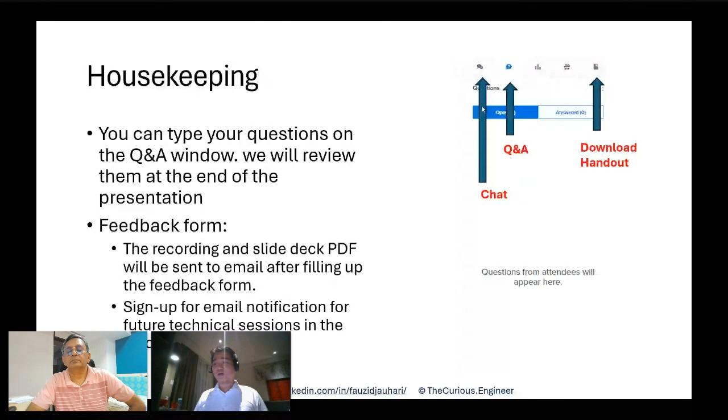Okay, I don't want to take too long, I'll go fast. Basically, the session will be two parts. I will cover the first part, giving a bit of overview of blowdown, especially the technicality and the availability of tools in HYSYS, the different steps you need to do. And the important part is part two, which Viresh will deliver, on the case studies using depressuring utility as well as the blowdown utility. I'll turn off my video now to save bandwidth and to allow you to focus on the content.

All right, let's get started. So the blowdown, right? Depressurization, right?

So what is actually blowdown analysis? Basically we want to rapidly reduce the pressure or depressurize the vessels or equipment. When we actually do this, typically, maybe first, why do we do it?

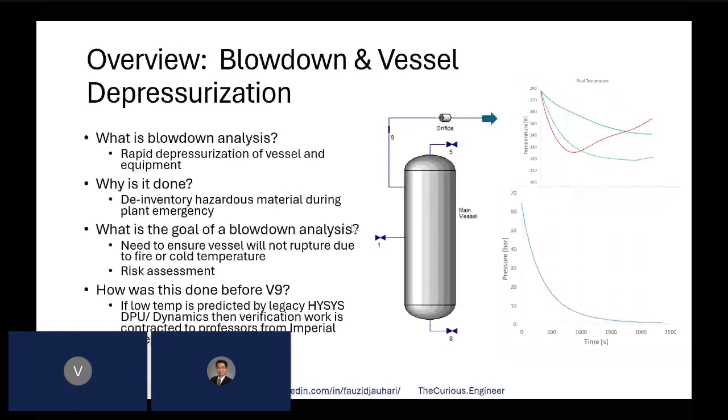So typically, what are the questions we want to answer? So depending on where, let's say we are designing a system, definitely we want to size the system, and one of it is to determine the size of the orifice.

To allow that we will achieve or reduce the pressure, let's say based on the criteria—it could be half of the design pressure within 15 minutes. So what flow rate do we need to pass through that orifice? What is the peak mass flow rate that needs to pass through that orifice?

So this will also determine the size of the pipe in that system. It could also influence the flare system, the main header, and the downstream system on the flare. Okay, and also typically we also will look into the temperatures.

This will impact what materials should be selected. Of course, if we encounter low temperature, then probably we need to switch to a more appropriate material, like stainless steel.

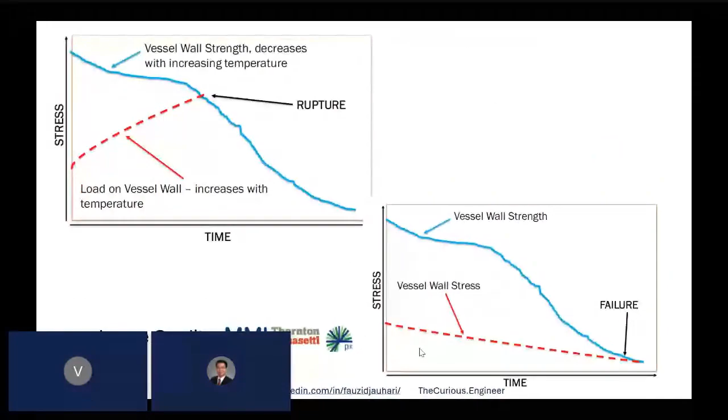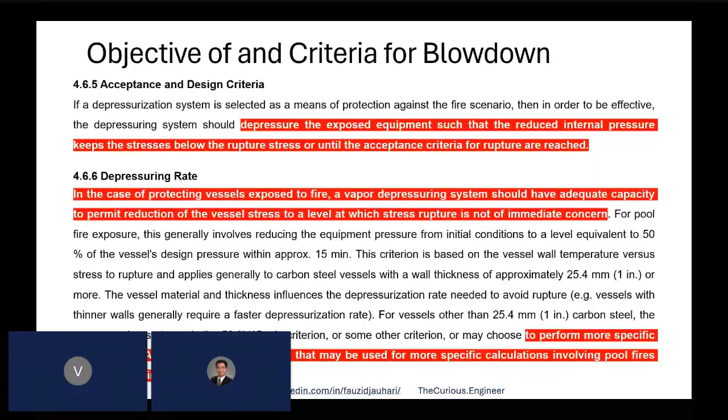Excuse me, yep, go ahead Fauzi. Sorry Viresh. Yep, looks like the audience are unable to see the slides properly, there's an obstruction from our profiles over the slide. Can we hide our profiles? Let me stop sharing, in case that helps. Just in case, right, and people have also requested about the recording.

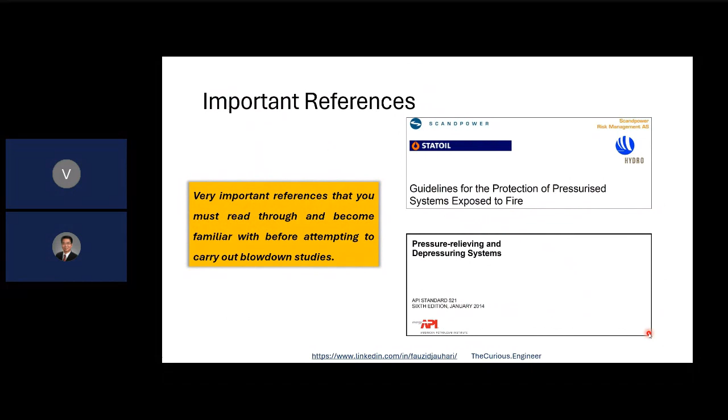All right, let me go through this. I want to share a little bit before we have the blowdown utility, we actually have the depressuring utility. In that depressuring utility, if you have used it before, we calculate the total volume of the system, including the piping as well as the vessels. Typically we do these calculations in Excel, and we come up with a new equivalent vessel dimension, so in essence we combine all that volume from pipings as well as the main vessels into one single vessel with a new dimension which reflects the system volume.

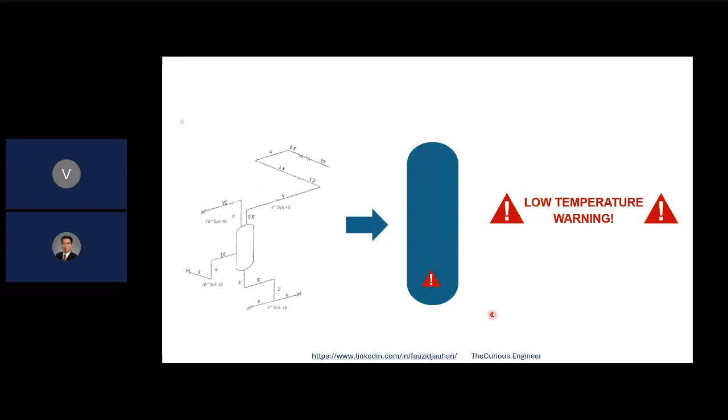So by doing that, when we run the depressurization calculations and encounter low temperature, it is hard for us to determine, or it's almost impossible to determine, whether it's really the vessel or only certain piping. We can't know, because everything is combined into one single volume or system. So if we make a decision based on that, we have to change the whole system, let's say to stainless steel, then it will be a major cost impact to the project.

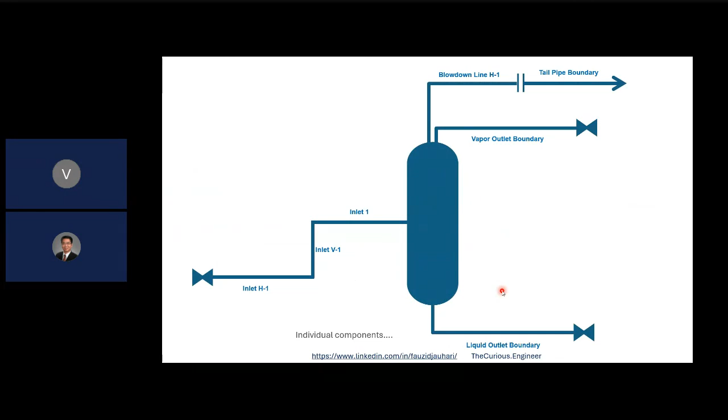Okay, so in the blowdown utility, now basically we model all the systems individually. So when you go through the blowdown utility, you will specify how long is the inlet piping - the horizontal part, the vertical part - all the other lines, also the vapor outlet, the blowdown inlet line, the tailpipe. So all this is actually defined as individual system components, the pipes and the vessels separately.

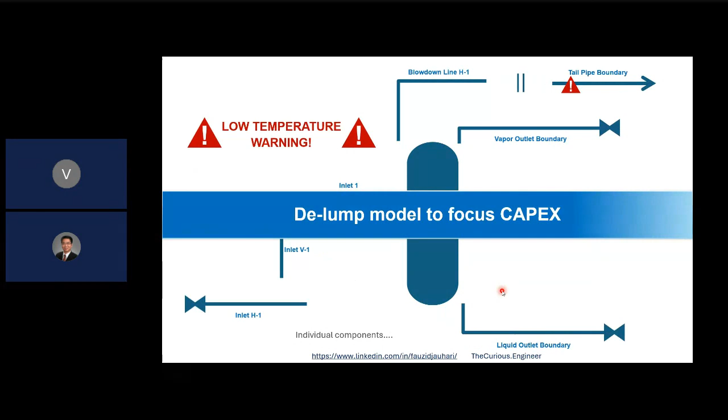So we are inputting the individual components. So when we have an issue, or the calculation detects low temperatures, we can actually know exactly which part of the system is exposed to the low temperature.

Okay, so just to give some background, the blowdown technology which is incorporated in HYSYS is acquired from Imperial College, and has been validated with over 400 projects. So it does help to minimize capex, validate the wall temperature predictions to within 3 Kelvin, and eliminate uncertainty in analysis by using a fully predictive, rigorous thermal package.

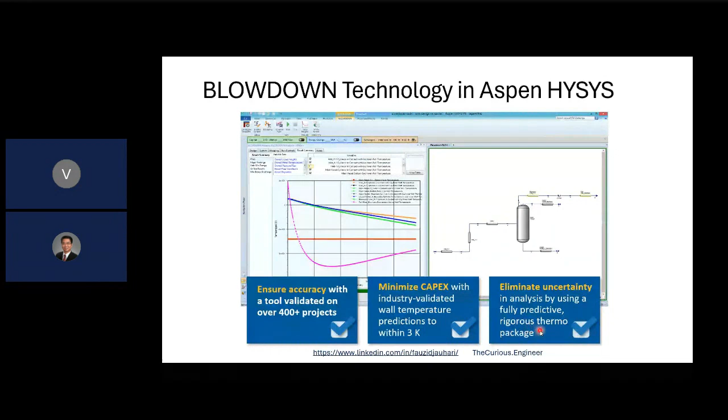Okay, this is the background. It's developed by Dr. Graham Saville and Professor Stephen Richardson from Imperial College. Initially, blowdown was offered as a consulting service by Imperial College, before it was acquired and incorporated into HYSYS. So it was trusted, and the gold standard of the technology for depressurization, and it has been validated against actual plant data for nearly 30 years.

We have, so you can predict the accurate temperature within plus minus 3 degrees Celsius. It dynamically simulates the hydrocarbon flow from multiple depressuring vessels and other equipment, and is also a fully predictive model.

So maybe many will ask, what's the difference between the legacy depressuring utility and the HYSYS blowdown? Just to make it clear, blowdown is the recommended tool or technology for depressurization. It has been trusted by the industry as proven technology. It considers the nucleate boiling, as I described just now, it considers the rigorous vessel, piping, orifice model. It's also thermodynamically able to handle dense phase fluid. And the other thing is, when you use the depressurization utility, you need to input constants, like for example the PV work term, the recycle efficiency.

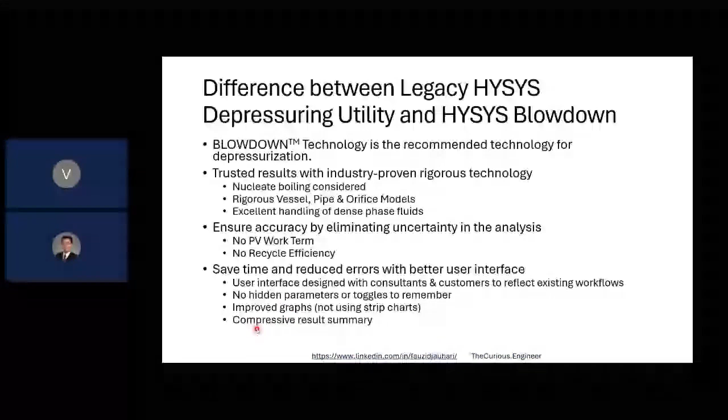In terms of the calculations involved in blowdown - what actually is involved? First, of course, the fluid mechanics - it could be one dimensional, one phase, or multi-phase. Three-phase is also possible with high water content. Also, of course, the thermodynamics.

For multi-phase, multi-component, near critical conditions, we actually have to predict the phase envelope correctly and accurately - the liquid density, the latent heat. And also the heat and mass transfer - heat transfer from the environment, the fire case, conduction, convection, boiling, and also radiation if there is a fire.

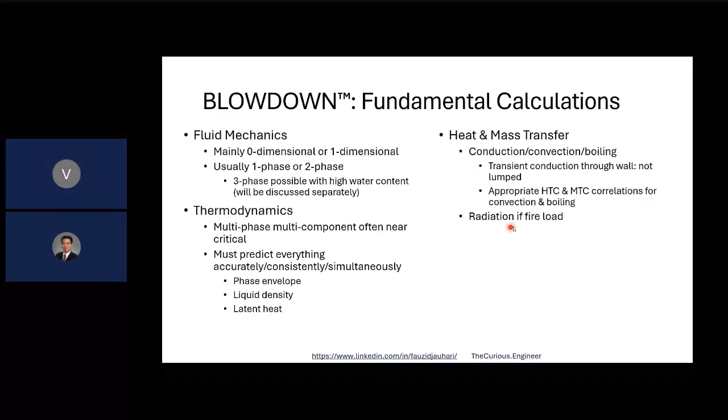So, in terms of the thermodynamic model, it uses a proprietary equation of state model. It's only available in blowdown, it cannot be selected in the property environment.

It has a standard set of component lists. This equation of state is superior to the property environment in predicting supercritical fluid properties, and it's fully rigorous and predictive - no need to specify again the PV work or the recycle efficiency.

This is just to give illustration that in upstream applications, the conditions of the vessel actually start at the supercritical region, then move across to the vapor liquid envelope. Blowdown can predict this kind of change of trajectory, including the change of properties accurately. If we're not able to predict this thermodynamic behavior, we could end up oversized or undersized, depending on the case - a poor result.

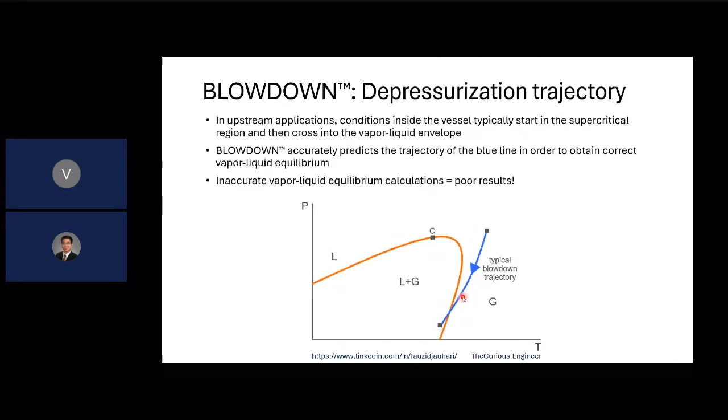In terms of the orifice calculations, these are the background details. The expansion is assumed to be reversible from upstream to the orifice, then assumed irreversible from the orifice to the downstream. The pressure drop in the upstream piping is neglected. The shape of the orifice itself is typically reflected in the discharge coefficient you're using.

The discharge coefficient is a ratio between the actual flow that can pass through that orifice or opening, versus theoretically the maximum that can pass through that opening - like an efficiency of the opening. Typically it's about 0.9 for gas or a mix of gas and liquid, assuming the homogeneous equilibrium model, and about 0.6 for liquid or flashing liquid.

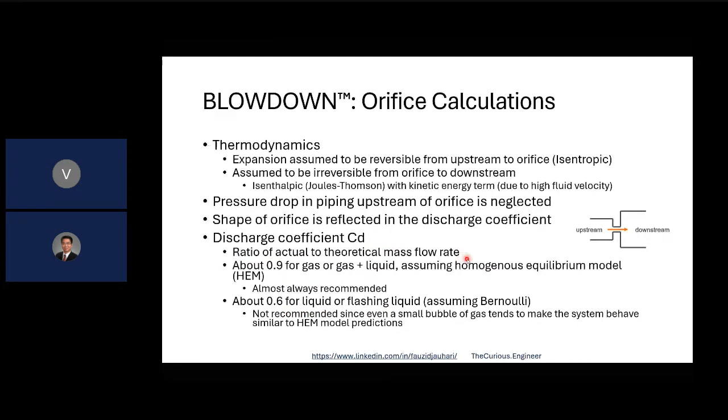All right, so this is a snapshot on how you use the blowdown system.

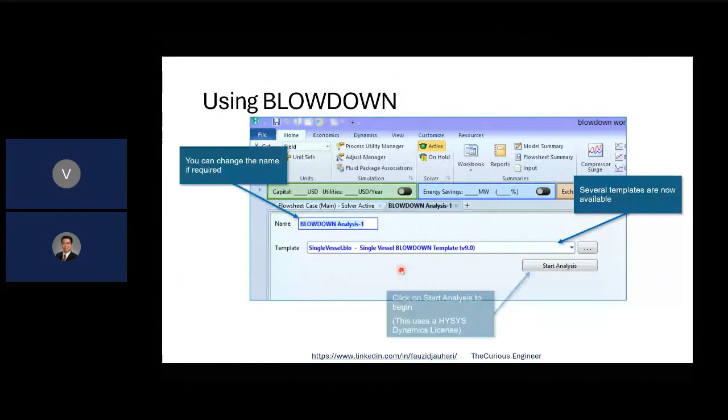Let me show this in the home screen. You have this safety study - when you click this, you can see there's blowdown depressuring. You just click blowdown and it will open a form like this. You can name the form, and choose the template - for example, a single vessel template. There are several templates available. Then you can click start analysis.

The liquid drainage is important also to accurately predict the wall temperature, because the liquid will actually act as a moderator and will result in milder temperature predictions.

Typically blowdown is performed in two types. The cold case, assuming there's no heat input from the surrounding - fully adiabatic. This is basically done to check any issues with low temperatures, if there are any potential issues with low temperatures.

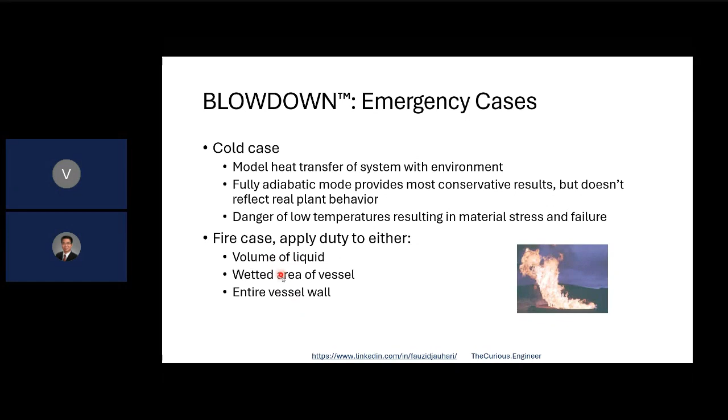But we also do the blowdown calculation for what is required for fire case - whether we can actually evacuate the inventory, size the orifice properly, and confirm that we can reach half of the design pressure within 15 minutes. For fire case, you apply the duty, the heat input to the volume of liquid, the wetted area, or the entire vessel.

I just want to give also - when we are doing blowdown calculations, when we're doing equipment sizing or any sizing, typically we deal with two types of calculation mode. First is design mode, and second is rating.

By default, the calculations in blowdown is a rating mode where you actually specify the opening. You specify the opening and you check the performance - whether the targeted pressure can be reached or not. By default, that is the calculation mode of blowdown.

This is maybe applicable for existing facility - you might want to validate existing facility performance, yes. But for greenfield or designing a new facility, you'll need to calculate the orifice.

So typically, what we do is we put an adjust - we adjust the orifice opening to target the final pressure. You have to activate this tick to automatically run blowdown on input. So what this adjust will do, it will actually vary the opening until it gets the final pressure within the time targeted.

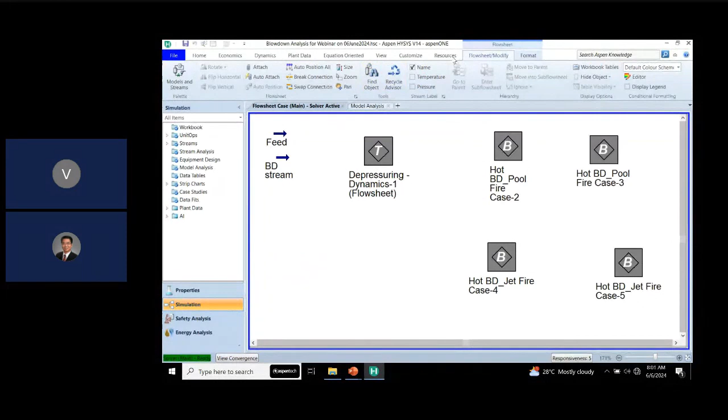Okay, let me see. Let me open up one example here also, just to show you what.

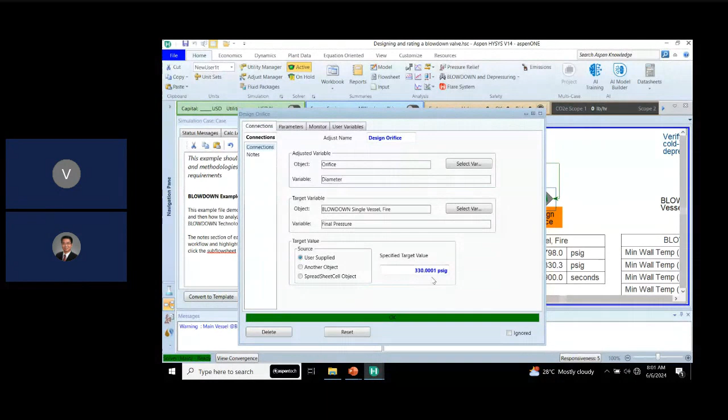Okay, so here you can see this is the design - you put design adjust operations, and basically we target the orifice of the blowdown utility, and the target variable is the final pressure. We can input the final pressure here. Just make sure also the blowdown utility to tick this Run BLOWDOWN on input.

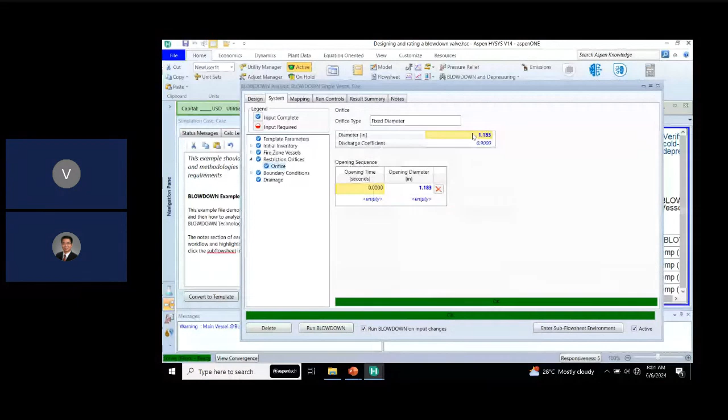So then it will iterate to find the opening of the restriction orifice. So it will adjust this opening.

Just to also - when we're talking of this blowdown, individual system blowdown, especially maybe for existing facility, additional system - when you calculate the additional blowdown peak flow rate and add it to your current total blowdown peak flow rate, it might actually exceed your flare capacity.

So in that case, your flare capacity header or tip might be designed for a certain flow rate. So in that case, many companies have considered to actually stagger the blowdown - meaning they will prioritize opening the critical system, but some systems they will not open all at time zero, they will open it at different times, just to avoid the peak, especially at time zero, exceeding the flare design capacity.

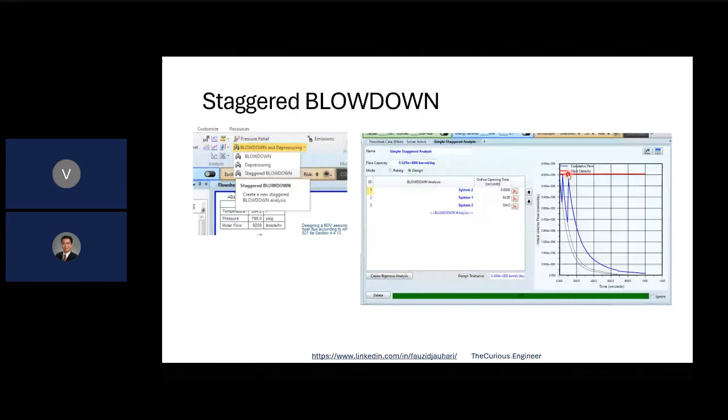So this analysis can actually be done easily in the staggered blowdown. You can see here we have the staggered blowdown utility. Let me open also just quickly.

So by doing the staggered blowdown, you have to do individual blowdown first. So basically it will actually superimpose the calculation from each of the systems. Here, you only need to put the flare capacity.

If you put design, then it will calculate when the system needs to be open - is it zero or some other time? If your rating, basically you put the time yourself. So that's just a quick introduction on the staggered blowdown, just in case.

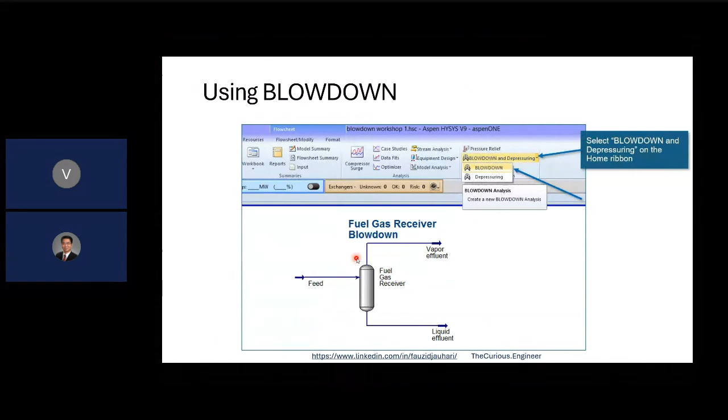So this is, I think I've gone through this already. Then defining the blowdown - okay, let me open this.

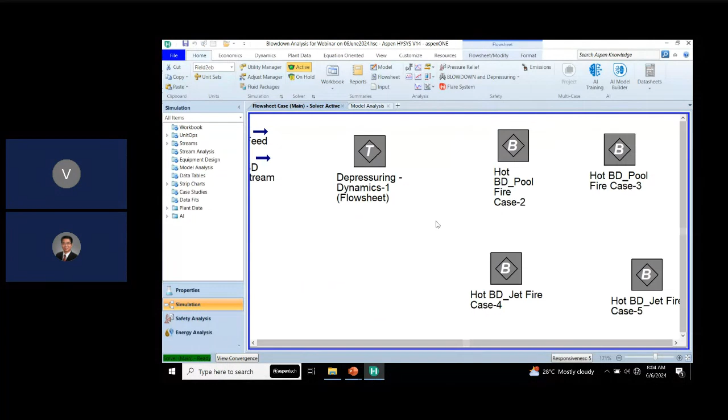All right, so let's say I'm just opening. Right, so actually here you can see - I'll go through this quite quickly. The slide that actually explains this - give me 1 second. Right, so let me open this.

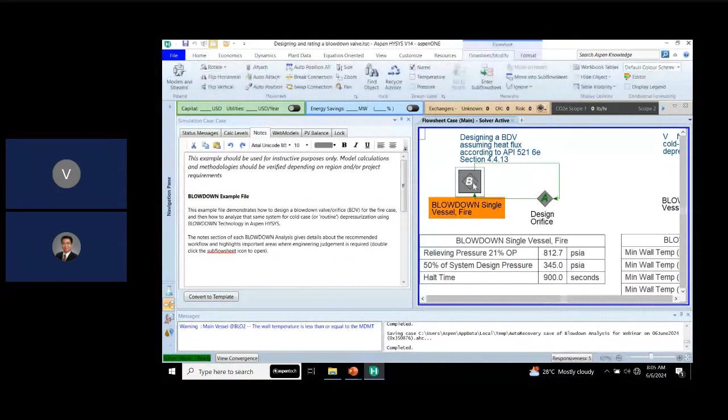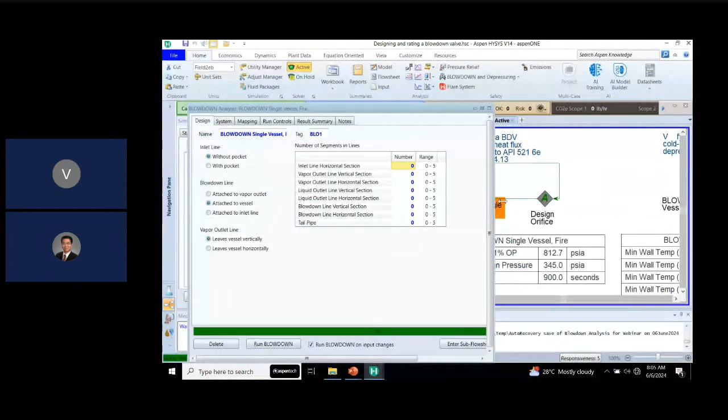So basically here, you can see, this is when we define the blowdown - we define how the inlet lines, etc. are set up. You can see here, alright, yep, like that, okay you can see here.

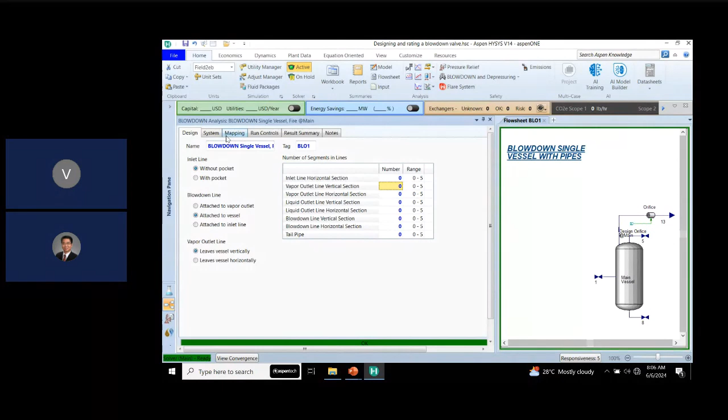Actually we can vary this - typically, for example, you can see we're removing all the pipe, but you can include, for example, the pipe like that. So typically the number of pipes there depends - for example if your inlet line has vertical, horizontal sections, or your line has multiple sizes, then you can put different segments. We can accommodate up to 5. So this is defining the system.

And again, this is where we will define the compositions. We can copy the compositions from the inlet stream.

Then also for the vessels, we define the dimensions, the thickness, the design temperatures, and also the orifice. Once we define the systems, basically we'll go to the mapping.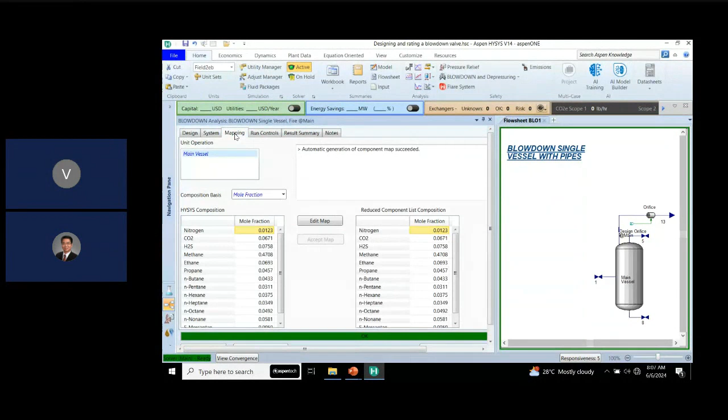Blowdown will look at your component and map it. One thing is it will not map the hypothetical component, so we will need to make decisions on how we're going to map if your fluid involves hypotheticals. I've gone through this one already - I think this is the template.

If you have vessels in the system, you can define using this tick box which part is actually exposed to fire.

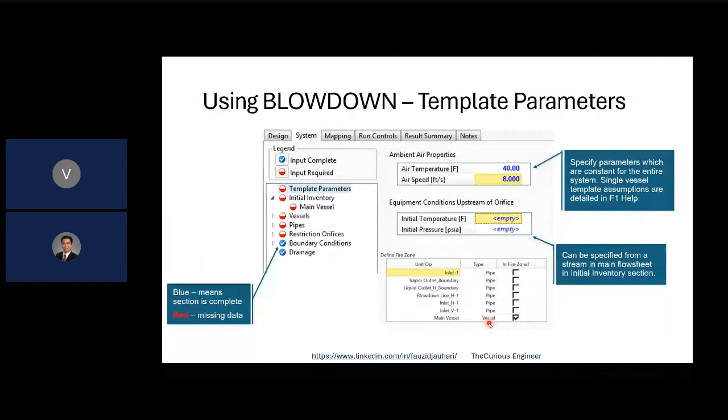So this is the few steps you can go through, like copying the initial conditions, the vessel definitions, and the fire case. Typically we also define what is the initial liquid level.

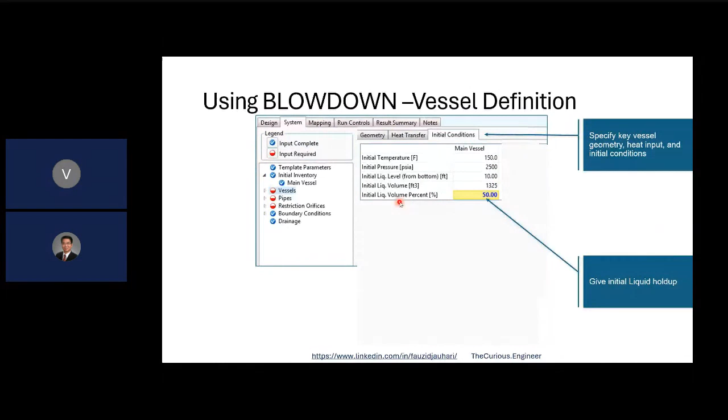Liquid inventory in the vessels. So here is where we define the individual pipes. Remember, in blowdown we define all the details of the individual pipes - we don't lump it together with the vessels.

So you can see we can put the material, the pipe schedule, the size, the length, if there's any change in elevations, as well as the design temperature. When you put the design temperature, it will then highlight if this design temperature is exceeded or violated.

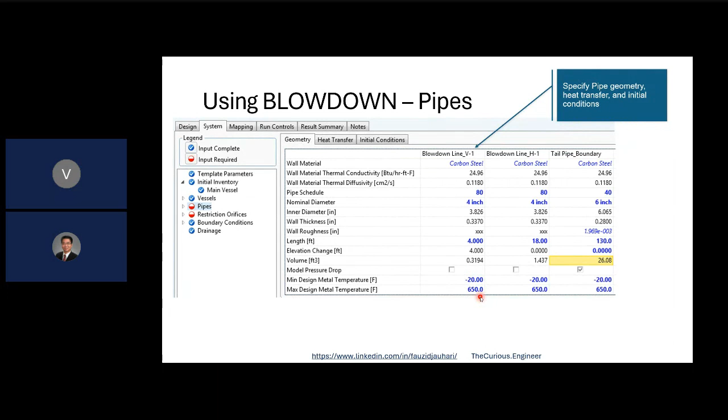Here is where you put the orifice. Remember, by default it's a rating calculation, so you define the diameters and you check the performance.

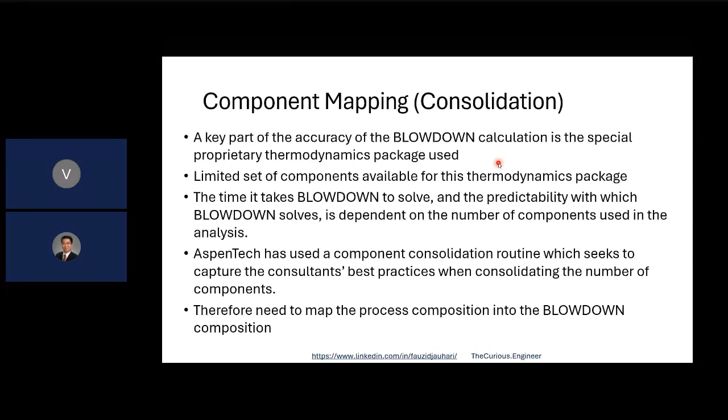Touching on the component mapping - I guess the time is quite limited, and in essence, blowdown will do the auto mapping. But it will not map the hypothetical, so we will have to make the decisions. For example, the simple, straightforward pure components will be mapped automatically.

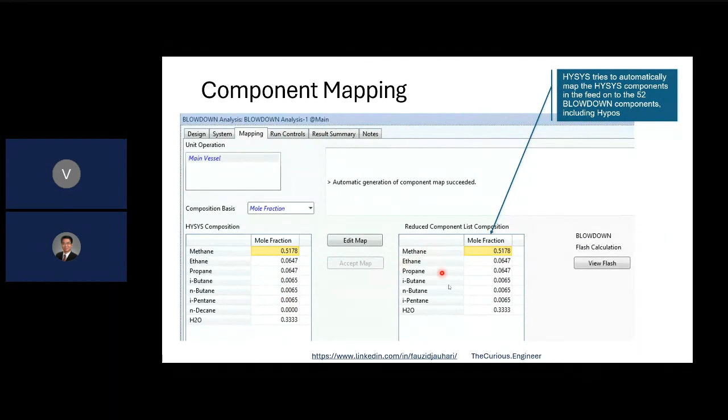You can click this edit map to view. So you can see here, certain components like the hypo component - there's a method on how we actually can map to which component, based on molecular weights, etc.

The details of the approach are put in the appendix of this presentation. So this is an example - for example, we have to find the component with the closest normal boiling point. For example, N-pentane is the lower molecular in the list, N-heptane is the higher molecular in the list.

Basically, we distribute the components for that hypo into these two blowdown components. So this is the kind of prorating of the two components. We can see from one hypo component, we split it into this pentane and heptane.

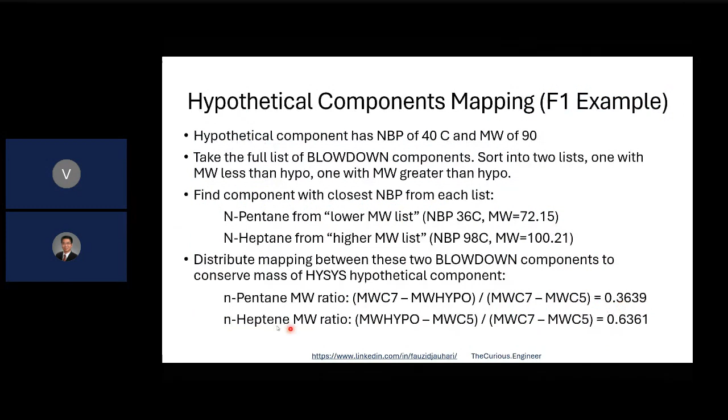Okay, then finally the run control - this determines when we're going to stop. So either by time, say 15 minutes, or when the final pressure, the targeted pressure, is achieved.

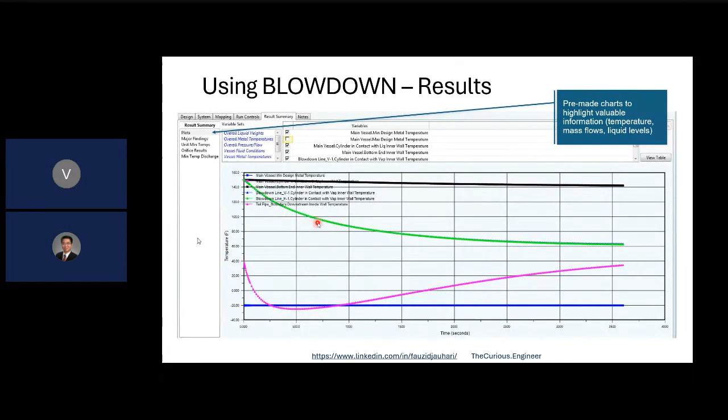So once we run, we can get the plot, the summary of findings - for example, how much flow is actually passing through the orifice, what about the temperature on different sections on the vessels, on the different lines. All right, so I think that's a lot.

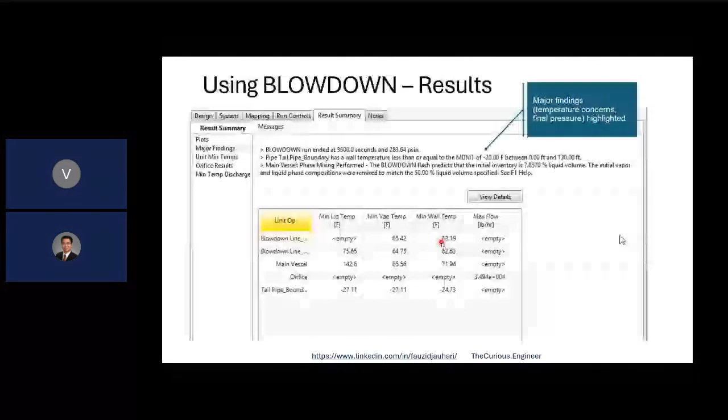But I hope that gives a good overview of the functionality of the blowdown. I think next I will hand it over to Viresh. I'm sorry, I think I've overrun, but let's get to the exciting part, the case study.

Viresh, maybe you can share your screen - you want me to flip the slide, or let me flip the slide? Can you see my screen, Viresh? Yes, I can see it, and please do me the favor of flipping it. All right, thank you Fauzi. Especially, I want to thank you for inviting me to host with you. I get this opportunity to share some of this stuff to the people.

Okay, I have seen some questions - I'll try to capture some of the answers here. Fauzi has already given some descriptions about some basic fundamentals and some basic procedures.

Which I will pass through in a fast mode. But remember, since today we are focusing only on how to utilize the utility from HYSYS, we are not talking about technical details. There's a lot of other issues related with technical, which is not possible to capture now. Probably we'll have to plan that webinar separately. But some relevant aspects I will still

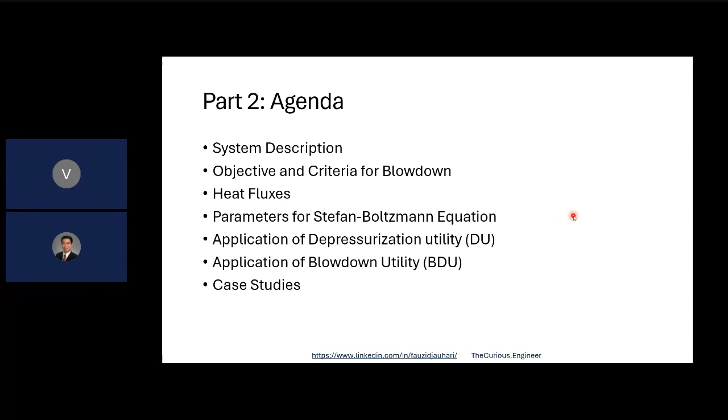So the cases which we will go through: first we will size the orifice for a system, which I'll describe later, using the same old concept of 7 bar G in 15 minutes depressurizing. Then whatever orifice size we get from this depressurizing utility, we now use blowdown utility with the same conditions, but using the fundamentals of BDU, blowdown utility, and see what is the difference between when we use DU and when we use BDU.

So once this is done, we will incorporate the concept of heat fluxes, and then see what it means when we use heat fluxes, how it affects the results. So all these three cases will be based on the pool fire.

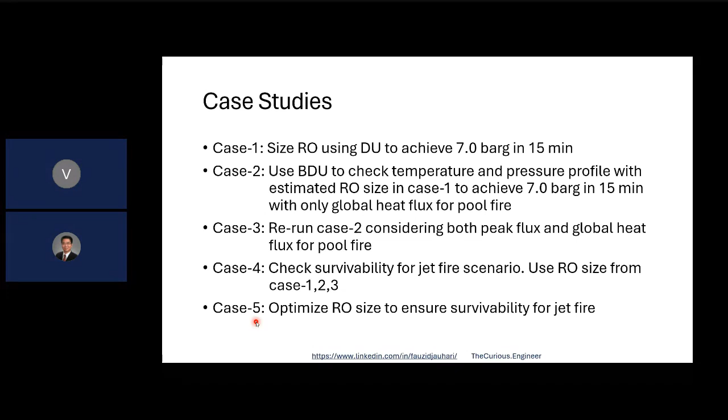The next two cases, case 4 and case 5, we will talk about jet fire, and how the same orifice size behaves when it is jet fire. Then we'll try to figure out whether it was good enough or our equipment is rupturing. If it ruptures, then what should have been the orifice size. So that is how we'll cover one single case, one single system, in different scenarios.

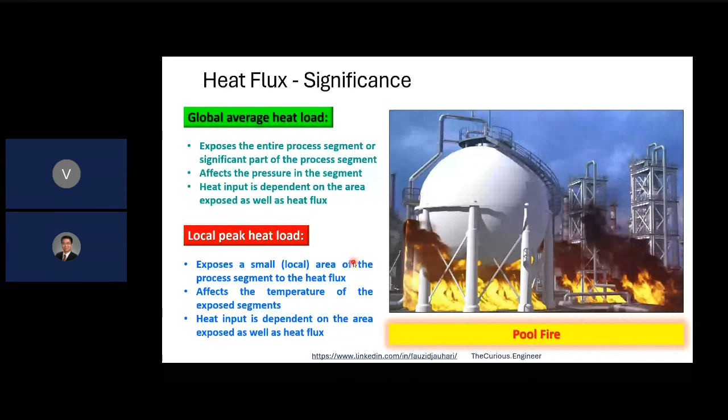In the next slide is jet fire. Jet fire is something which is coming from the source, the leak. So the local peak heat load, heating the vessel, the surface area is quite less compared to pool fire, but the intensity may be more. But fundamentally the same thing: the rest of the area which is not experiencing the heat directly, the heat absorbed is called global average heat load, and that is the one responsible for increasing the pressure inside. Next please.

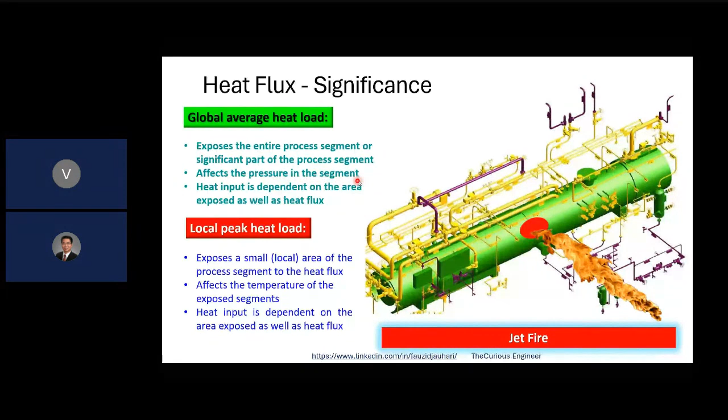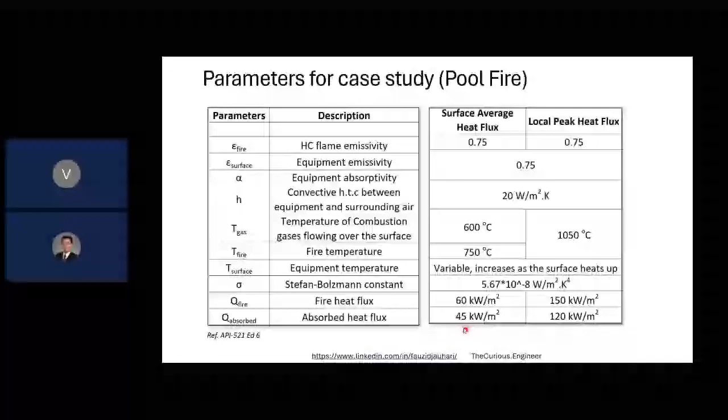See what happens in the jet fire. When the jet fire starts, the power is enough because pressure is still there. As draining takes place, the pressure inside the source will keep on decreasing. So the length of the jet fire and the location where it is hitting will keep on changing. Slowly the fluid coming out of the hole causing the jet fire will keep on reducing. So that is our two flow rates, and we are supposed to handle both. How we will handle and how we do it, we will not be able to capture now.

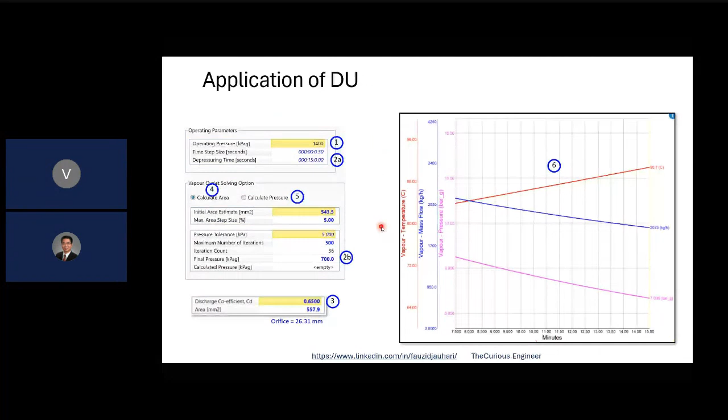Now here, the same system, now we want to talk in terms of blowdown utility. You see, you have got a vessel here, and you can represent all these pipings into different configurations, like whether your blowdown is at the inlet or at the vapor outlet, whatever. But the important thing is here.

I have given you a very simplified version of the system, but whatever system you will be dealing with, you have to figure out which part of the whole system is going to be exposed to global heat flux, which part will be exposed to local heat flux, how much, and which piping will be exposed to what type of heat flux and what type of heat. To get all these answers, I'm afraid this is not the right place because it is a whole lot of other detailed part of it, so I will not be able to do that. But the important thing is that here you have the opportunity to decide which section of your system is going to be exposed to what.

Like there are some systems which may extend from a source to some other location, and in between there is a bridge, or a firewall, or some structure. That means the heat may not be able to go that far. So to be able to do justice properly with the component and give them proper heat absorption, it is a very good idea to have a very good knowledge about the 3D model.

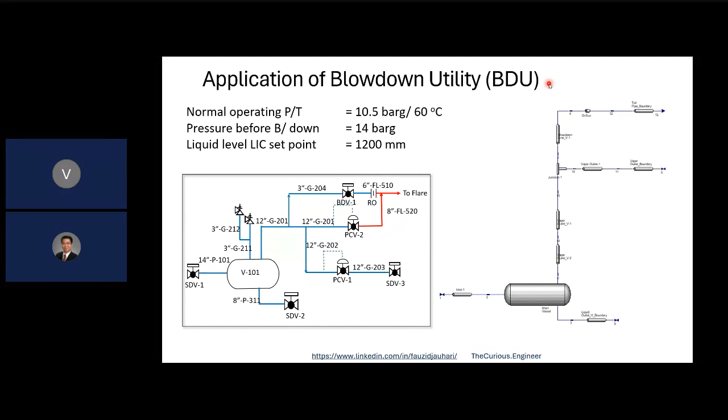When you will be entering that information, this is the sequence of information you will be entering: one, two, three, four, five. First you enter the design data, then system mapping and all those things, like that. Let us see if we can give you some indication about the example we have taken and how we have entered the data.

Now see here, this vessel has got inlet, vapor, liquid, blowdown, tailpipe. So what I have done is to represent my system, which is on the right hand bottom line. I thought that this type of configuration which you see here - inlet line, how many vapor lines around - so I tried to find out how many numbers of which type of lines can be representative here.

Each of the type can be 0 to 5, so almost 35, 40 pipings can be accommodated. But suppose your system is too big and you want to lump. So when you want to lump, like for example...

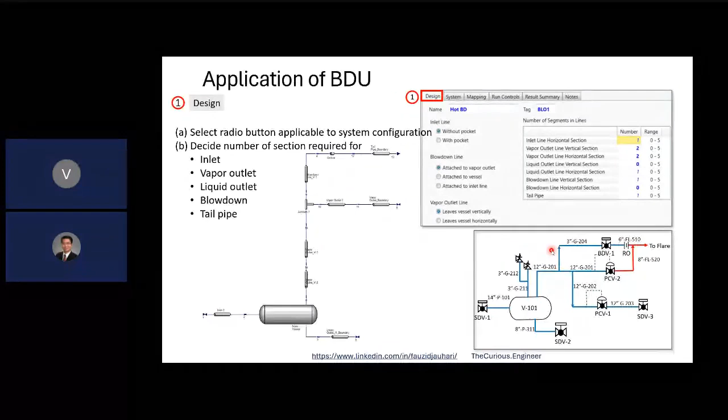The piping just above the vessel vapor outlet, the first and second - suppose there is something which you have to lump, and suppose it's not possible to accommodate into the whole system. So whenever you want to lump, make sure the lumped pipes have the same thickness. It should not so happen that you have lumped the piping to make the common volume but with different thicknesses, because different thicknesses will absorb heat in different ways. So make sure that when you lump it, the thicknesses should be the same. Okay, next please.

Now this is about when you start entering the data in the system template parameters. In the template parameters, what you are doing is defining your air temperatures, because your air speed and air temperature are going to affect the heat carried away by the air, and ambient temperature will affect the heat absorbed by the vessel. So you enter that data.

Then initial conditions - like I said, some companies want to start their blowdown based on your pressure alarm high, or 90% or 85% of the safety valve setting, or whatever your company decides. Or if you are from a consultancy background, whatever you have been advised to do. If there are no instructions and you have the liberty to take a decision, probably you want to be conservative.

Now at the bottom right hand, where you see fire zones - there is different piping on the left hand side, unit operations, then type. So you have got a vessel and so many pipings. This is where you decide whether it is a pool fire or a jet fire, or a heat flux - global heat flux, or peak heat flux, local peak heat flux, whatever it is. You select here which one you want to be exposed and which one will not be exposed.

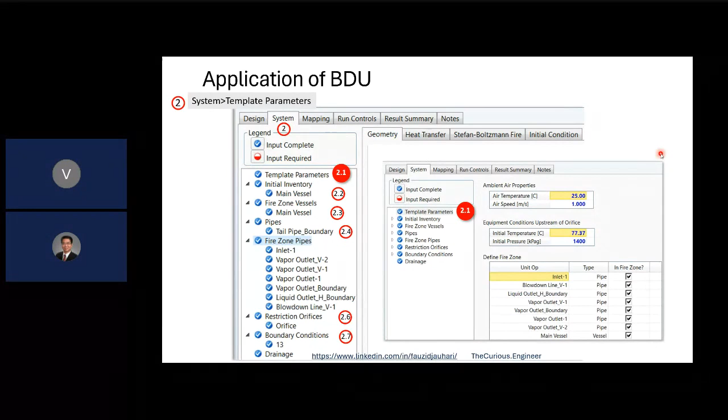So this one, we are talking about the stream. Because if it is a simulation, you need to have a stream defined, so that you can link it - because the blowdown utility is going to be a standalone separate simulation model. So what you can do, you will have some main model for the whole facility. From that model, for every system which you want to deal with, there will be some inlet stream. So in that inlet stream you can export and then import back to the new slide, and then you can link it - but make sure that stream is well defined, meaning it is already solved and not unsolved.

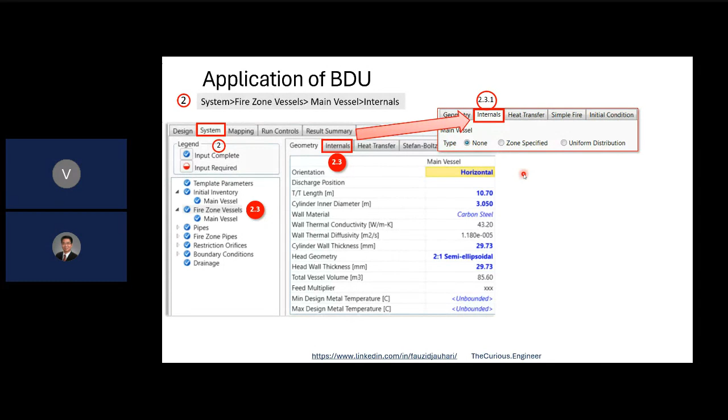Now I have been talking about heat transfer. We already have entered the mechanical data. Now we want to take a decision on which type of heat we want that component to absorb. You have the option to select whether it is simple or Stefan-Boltzmann type. Simple means the type you normally do through DU. Stefan-Boltzmann means the type you do through BDU, blowdown utility.

If you see here, the information for simple fire is mostly automatically updated, automatically populated. You don't have to do much. But for Stefan-Boltzmann fire, you have to manually enter the data.

For this example, I have taken jet fire. So this information has come from where? Let us see. Can you click that back arrow at the top? Yeah, this one. So you see a jet fire.

Local peak heat flux and then surface average heat flux. If you see here the temperature is 900, your heat absorbed is 85, and your heat transfer coefficient is 40. So that information has gone there. But I have taken this for only more than 2 kg.

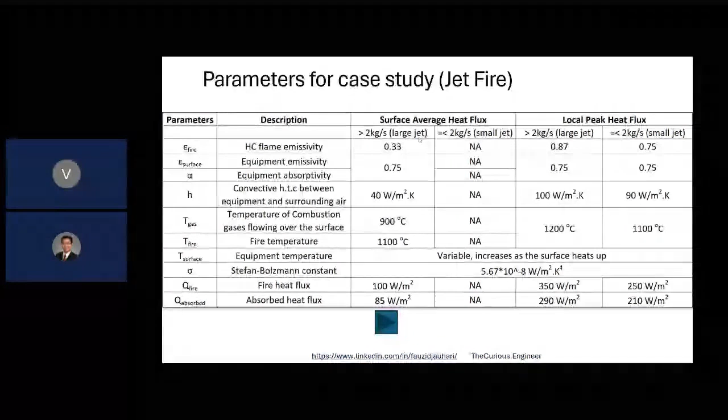Like I said, this is a bit detailed part to explain to you - more than 2, less than 2, all those things - unable to capture now. Okay, let us go back to the same slide now. So all this information is coming from there. That is how those tables are used. Let us go to the next slide.

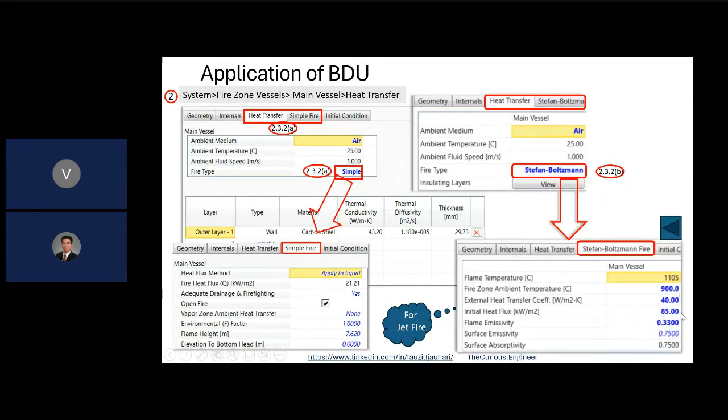In the next slide, again you are mentioning initial conditions. Still go back to the initial condition here. Now if you see here we are mentioning how much is the liquid, 1.2. You can mention percentage also, anything. But suppose you had selected water also, then there will be 2 or 3 more rows to account for the water also.

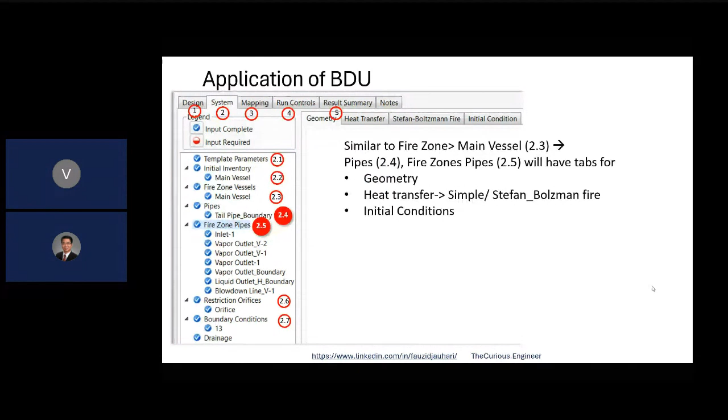Next please. So like that, just now we discussed about the vessel. Similar information we have to do for piping also - everything same, almost same. We are not doing it because it is exactly the same. The only thing is instead of vessel, it is piping.

Then here we are entering the orifice size, as we said earlier, whatever orifice size we have calculated for the first case, we'll continue to use the same one. Discharge coefficient will depend upon whether you are using a relief valve, a restriction orifice, or a control valve - all these will have different discharge coefficients.

I think somebody had asked whether discharge coefficient is as per Shell standard or something. No, that you have to decide. HYSYS will not decide. HYSYS has a default value of 0.9. It is a default value, but you have to decide whether you want to use Shell, ISA, or anything from the vendor. It is up to you. But be careful about the default value, because 0.9 is more close to the relief valve.

And then under view here, opening timing. If you see here, the bottom portion under the view - it is open timing and open diameter. If I want to blow down in such a way that for the first 10 seconds I do not want to open the blowdown valve, and after 10 seconds only I want to open.

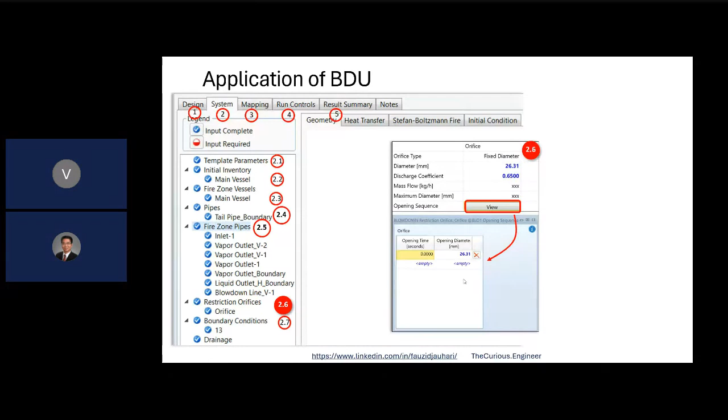But if you write diameter 0, calculation may not take place. So write 10 to the power minus 3, minus 4, some negligible number. This is some sort of cheating the simulation.

Okay next, then back pressure. That back pressure is the one which you want your system to experience when you blow down to the flare header. Typically for flare header, keep that pressure at 0 - it may be 0.5.

Because these pressures are only important when it is not a choke flow, it is subcritical flow. But anyway, your main concern is in the beginning, not toward the end. You are more concerned about the initial part where you want to find out what is the peak heat, peak blowdown rate. If you put a higher pressure, then probably it will stop at that pressure after depressurizing.

Okay, next please. So this is the same thing. Okay.

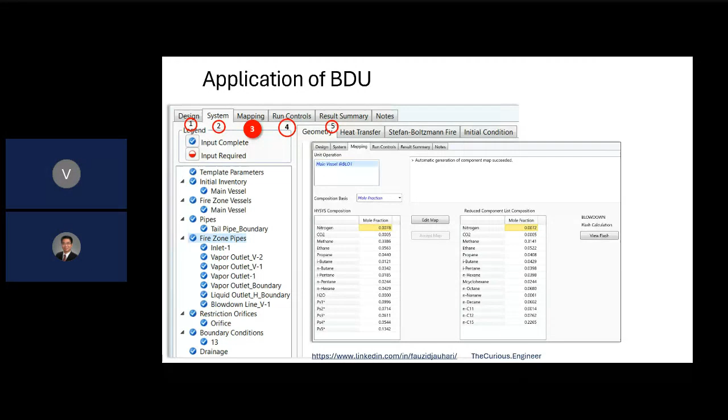If you see here on the left hand side, pseudo component, this is mapping, and how pseudo components have been converted. Someone asked why only 15, not more than 15 components can be accommodated. Your stream may be having 30 or 40 components, but for HYSYS it will convert it into equivalents. For example, you have C6 plus, so everything is lumped into one. Similarly, it will also convert into relevant equivalent components. The idea is your main concern is not the very heaviest, but that part of the liquid which will get vaporized on absorbing that heat.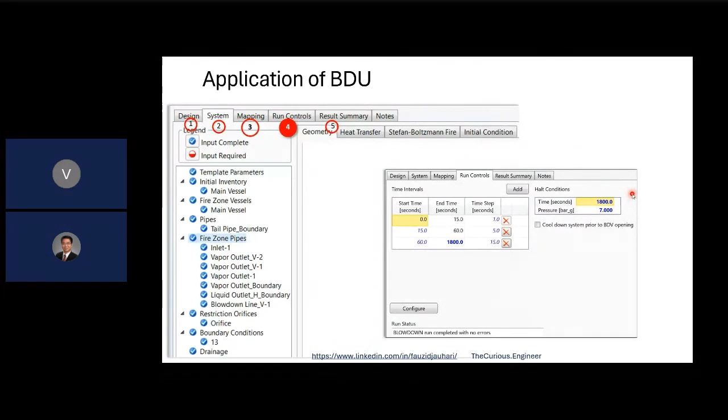Once you will have run and it is completed, your result will be populated like this. You will have three different specific zones, plots you will get, then major findings, and then orifices. Let us see what is in the plots.

In the plots, you will get a plot like this. Under variable set, you see the overall metal temperature in blue. There's a whole list of what you can plot, and on this variable you can select which one you want plotted. You can find out the liquid temperature, the vapor inside temperature, meaning the wall temperature in contact with the vapor which is inside or outside. Liquid temperature, vapor temperature, there's a lot of other information available, and you can select which one you want to be plotted.

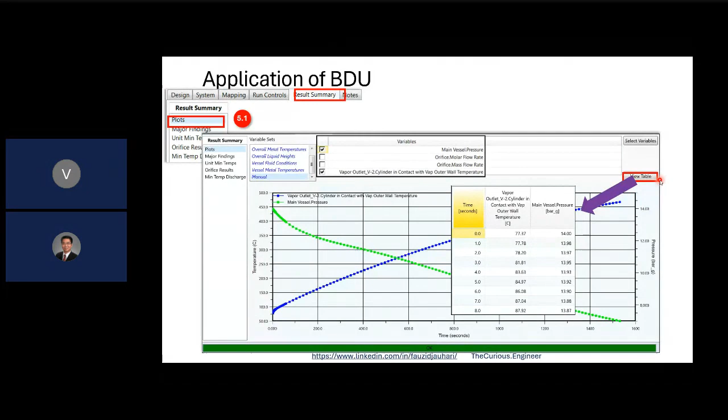Once this has been plotted, you see the table at the center. HYSYS has got a provision to view that information of the plots into a table. In this table you can get all this tabulated data, and the good thing is this tabulated data can be copied and pasted onto an Excel sheet. We'll see how we are using that information.

In the major findings, you will get all the information about what has happened during the simulation, any constraints, anything which is abnormal. Typically, you will find here that at the inlet, the initial inventory which you mentioned was something like 16% liquid, but in the stream which you have defined, it is not 16%, it is 10%. So when you define 16 and it's actually 10, that means the simulation model has to change the composition in such a way so that the liquid formation is increased to that level.

So don't force it. Be careful about the inventory of the liquid when you mention in the initial conditions how much percentage it is. Otherwise, simulation will assume that the initial inventory you have entered is the correct value, and the stream which you have used as input composition is to be corrected. Simulation will automatically correct it to suit condensation or not, the liquid formation into the vessel. The liquid is in the vessel, liquid is getting collected, but in the stream it is flowing per hour or per second, while in the vessel it is accumulated.

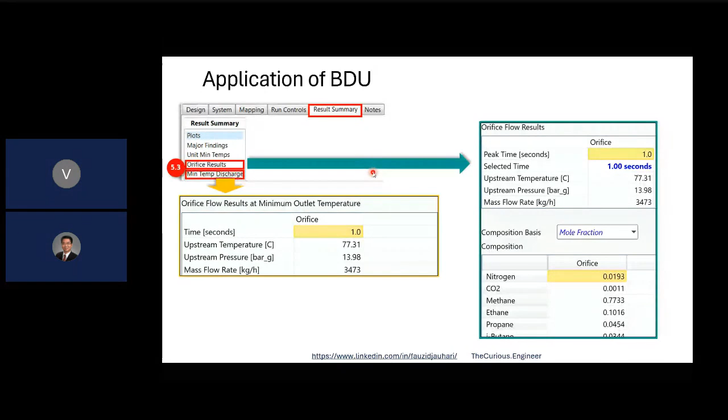Now I was talking about how this data in the result, the chart, the graph, can be converted into a table. In this table, if you see here, like all this blowdown utility, our intention is to find out what is the metal temperature, the temperature of that metal which is experiencing that heat, which you get here. Then because we want to find out whether rupture will take place or not, we want to find out the ultimate tensile strength at that temperature. So temperature you get from HYSYS, and there's a table here.

This table is from API 521. And since we are given two references in the beginning, the same table is available in the second reference also, which is the Scandpower report.

The API has got a bit different data than the Scandpower report because the sources are different. But it's up to you or your company to decide whether you want to use API data or the Scandpower report. I prefer to use API data.

Based on these metal temperatures, you are able to find out your tensile strength. Once this information is available, you can convert this data into your Excel sheet. Copy the metal temperature to your Excel sheet, you have got time, and then you can find out the von Mises stress. Von Mises stress is that stress inside the piping or vessel, which occurs due to increasing pressure.

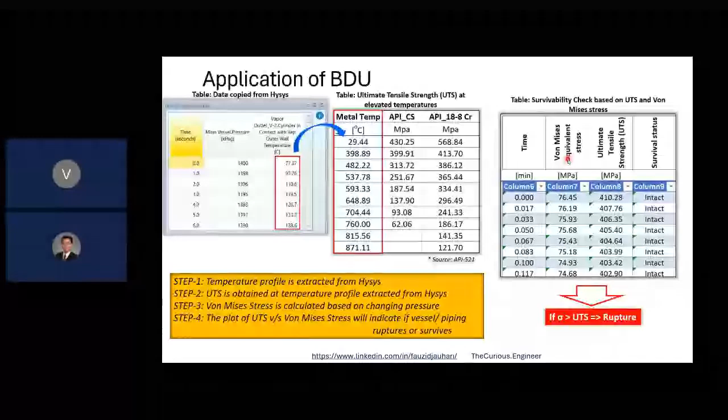There's a formula in API 521, and there's a formula in the Scandpower report too. You can put these two things in your Excel sheet, have tabulated data, and plot it. Whenever the stress inside is more than the tensile strength, it will rupture. So if stress exceeds the tensile strength, it means rupture. So it is possible to get the data, but from HYSYS you get the temperature first, and the rest you can do through Excel sheets.

Okay, next slide, please.

We will have 3 examples for pool fire, then 2 examples for jet fire. For pool fire, we'll first do a simple case and give the result. Then for the second case, since we're using the blowdown utility with the option of selecting heat fluxes, we'll first do only global average heat flux, because so far we had been using only the depressurizing utility where we never talked about these fluxes. Let's see what we get there. In the third example, we talk about average heat flux as well as local heat flux. Remember, local heat flux is the one responsible for increasing the metal temperature. That was about the pool fire.

Now jet fire has got different heat fluxes and different heat transfer coefficients compared to pool fire, so naturally the result will be different. So whatever we did for pool fire, we check using jet fire now, and see whether there is survivability or not. Let us go through the cases. Next, please.

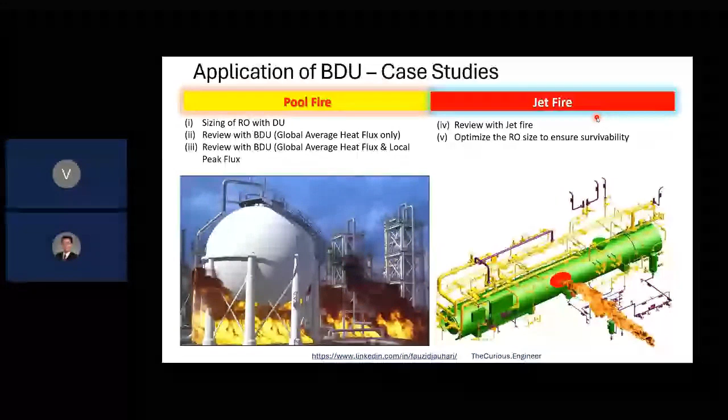Now this is case 1. No need to talk about theory, just see the results. This is the equation people had been using for this depressurizing utility, and the outcome is that you get orifice 26.31, calculated. Now pay attention to that equation.

This equation is Q, kilowatt, 43.2. F is typically that factor 1, meant for whether you have sprinkler or drainage or not. Then area to the power 0.82. Assume your area is 1, suppose I want to call it flux, meaning kilowatt per square meter. So Q by area, if everything is 1, then it becomes 43.2 kilowatt per square meter. Actually, not exactly per square meter because it's not squared, it's 1.64, but for the sake of comparison, we'll say it is 43.2 kilowatt per square meter.

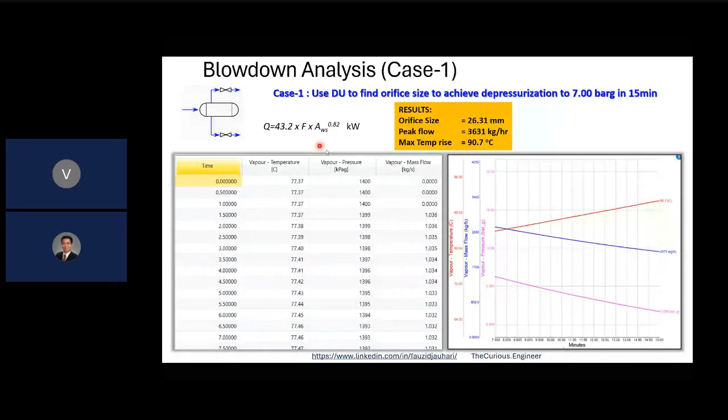And still we have not talked about the local peak heat flux, we are talking only about the global average heat flux. Probably this change is because for the heat absorption, the heat flux is 45 kilowatt per square meter, while for DU it was 43.2. So there is extra heat flux, and that is why it is taking longer time and higher temperature.

And one more thing I want to say is that when the depressurizing utility was being used... I think, is it possible to go back to the earlier slide where we took the extract from API 521? I had put some red color highlighting. I think it's slide number 9 or 10.

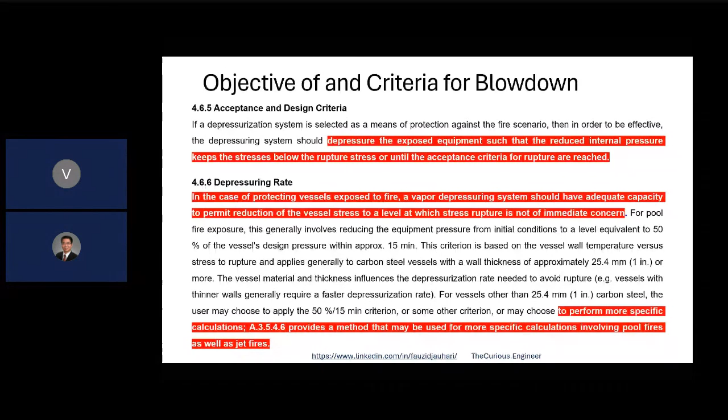Okay, let us. Sorry, Fauzi, can we go back? Can we again go back to those cases? I think case number 2.

So by saying all these things, I'm saying that now you have more reliable and more representative data, which means you should prefer blowdown utility as compared to depressurizing utility, right? So somebody had put a question asking which is the correct method, I suppose, something like that.

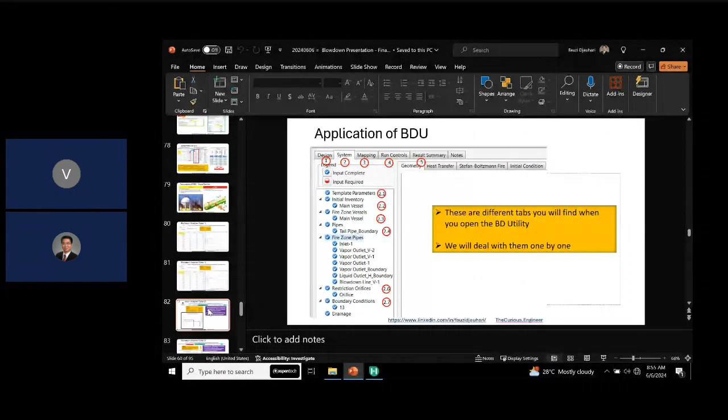So it's not a question of the correct method. The question is, what do you want? By saying that you are able to depressurize to 7 bar, do you think you are safe? Have you been able to avoid the rupture? That is the question you should ask. But by using depressuring utility, you don't have that answer. You only know that you have succeeded in depressurizing the system to 7 bars in 15 minutes. It doesn't indicate whether it will rupture or not. And at the same time, it's not defined what type of fire you had or what heat flux you had -- it's all a black area.

Okay, number 2. So this is what I was talking about. I already told you how, by using correct heat fluxes, you are getting this information.

Abdul Wahab has posted something. I would suggest at this point you focus on what I'm talking about. Digest it, and later you can have a lot of questions. You can keep posting the questions, you can directly send them to us, and maybe in the next webinar we try to capture all those questions. But at the moment, let's stay focused.

I'm trying to highlight that when using depressuring utility, your input is very limited -- you are not able to take a lot of decisions. Whatever the utility asks, you just enter data, but it doesn't meet all your requirements. In blowdown utility, you have the freedom to decide which system will be exposed to what fire. Earlier, with depressuring utility, you didn't need to know more, so you weren't required to enter more data. That's why the results were of a different order -- you are not able to decide whether it will rupture or not.

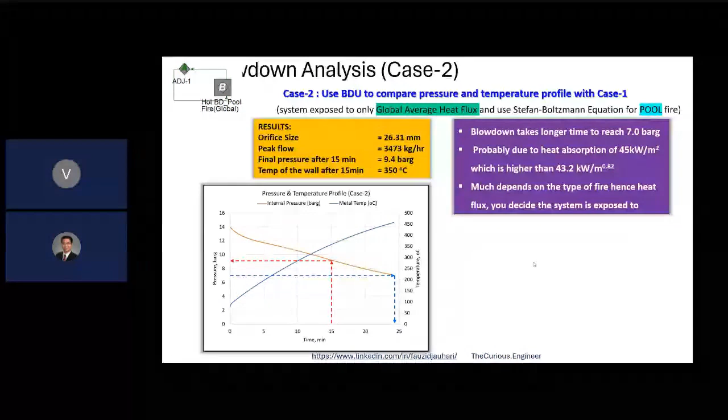So anyway, in this example, I had taken an orifice size of 26.31, right? The same orifice size as we started with for the depressurizing utility, and you find that this is very close to each other after only 25 minutes. Yes, I was trying to say, how long you want to depressurize depends on at what stage you get the confidence that it will not rupture. It's not a question of 10 minutes. It's not a question of 15 minutes. It's a question of at what point of time you will get that confidence that yes, it will not rupture.

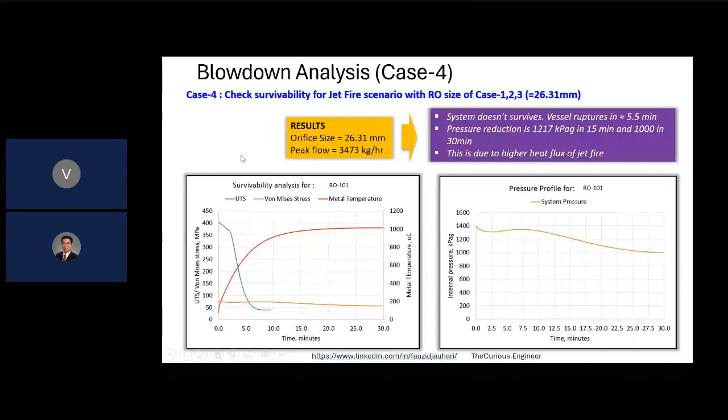And then the next case, which is also jet fire. Now here, the conditions are the same, but I am trying to find out how I avoid this rupture during jet fire also, right? So I have to increase the orifice size to 45, almost double, correct? But then I get the confidence that it has survived.

If you are designing new facilities, you still have control over your flare size. If you are rating existing facilities, your flare is already decided, the size, right? And that is where, after having carried out the studies of all the segments, suppose your facilities have some 10 to 15 segments, right? Out of 10 to 15 segments, you find that the orifice size of almost 50% has increased. Naturally the blowdown rate also increases, and most probably your flare handling capacity also has to increase, right? So that means now you will have to think of staggered blowdown, right? Okay, next slide please.

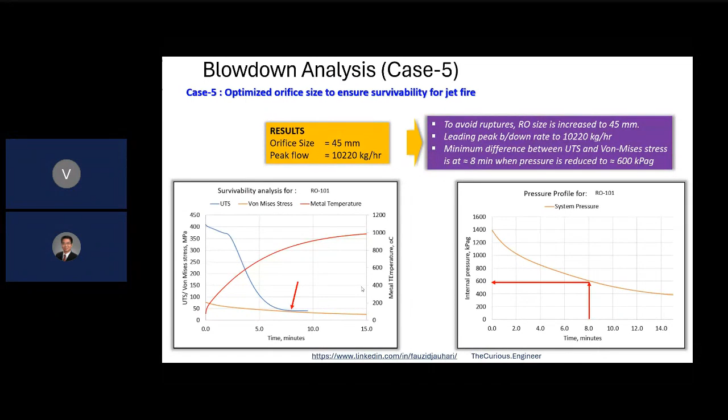So what I'm trying to say here is that by using these utilities, depressuring utility and blowdown utility, what you can do is find the section experiencing the minimum temperature. Okay, there was one question about minimum temperature, right?

Somebody was asking about minimum temperature, minus, carbon steel can take how much, SS can take how much, right? By using the cold blowdown - Fauzi has explained to you about the cold blowdown. Cold blowdown means when there is no fire, right? The blowdown is starting from your normal conditions, shutdown conditions where temperatures are close to ambient. When you do blowdown at that time, then your temperatures, especially at the tailpipe, will go very low.

So HYSYS will not tell you which material to use. HYSYS will tell you that your temperature can go this much low, and then you find out to accommodate that temperature what material is suitable to you. It helps you to take a decision which is the right material for you, right? But then you have to use cold blowdown.

Find the section experiencing minimum temperature during depressurizing - just now we talked. Size the orifice to ensure vessel, piping do not rupture during fire. Size orifice to meet rupture criteria if rupture cannot be avoided. I have not talked about what are those different criteria which are acceptable, because the company is supposed to take a decision if at all it ruptures. I cannot avoid the rupture - what do I do? What are those conditions where I can accept that?

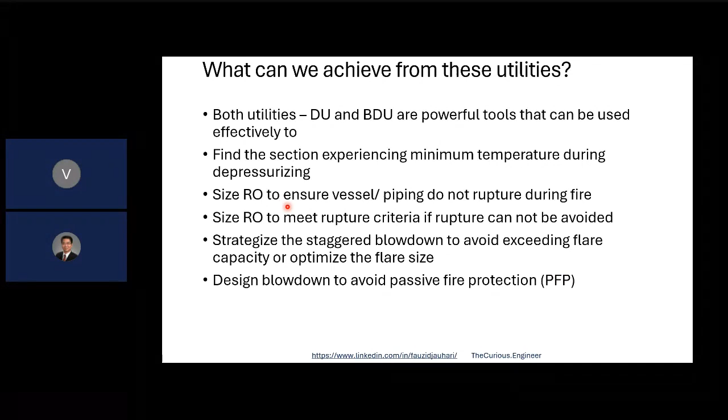Abdul Wahab had put some question which, yeah, what you are saying is right actually. As area will increase, your value will keep on decreasing, because the idea here is to show that wetted surface area will keep on decreasing - because that was the intention of the DU. But then BDU has got a different concept. Here the idea is you already have defined the liquid in the vessel or in the piping, and then you are defining how much is the heat flux, and then the whole of the liquid will experience that heat, absorb the heat, and then start vaporizing depending upon its boiling point.

Okay, with this I finished my work. Fauzi, over to you.